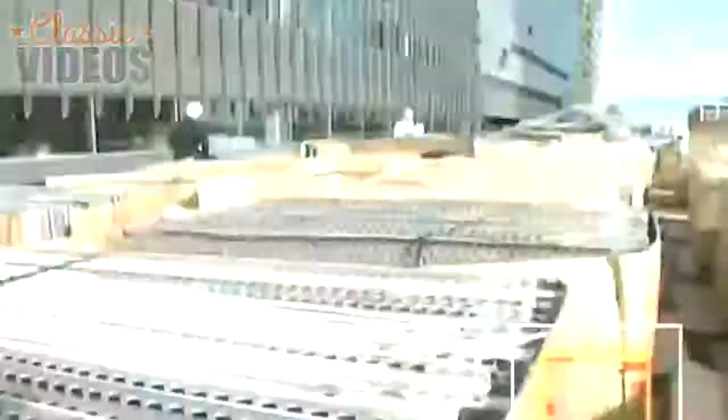For the past year, 8 months, and 20 days, the builders of the new California Department of Transportation headquarters in downtown Los Angeles have been busy pouring concrete, erecting steel, and installing walls and windows. The massive 750,000 square foot office building looks almost completed from the outside, but the structure is still pretty naked on the inside.

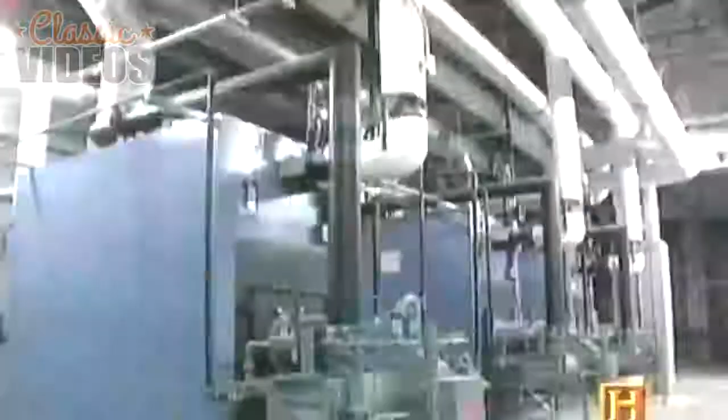It'll take another 7 months to finish installing the heating, ventilation, and air conditioning system and elevators. These are the things that make working in a large office building possible, even bearable.

Beyond the introduction of steel cage construction, no invention helped buildings, including our own, climb higher than the elevator. If we did not have passenger elevators, we don't have the modern multi-story office building, because people won't walk more than 2 or 3 floors off the street to easily reach an office.

The Caltrans building will have 19 elevators to shuttle its 2,000 employees to upper floors. Kone Incorporated will soon begin installing them.

In the meantime, Clark Construction is running a temporary man lift to move workers and materials. At the helm, Bobby Jeffers, man lift operator extraordinaire. This is a man lift operator's life - you're always getting loaded and you're always having your ups and downs. I've been running the man lift for 25 years all over Southern California. I've built hundreds of buildings. I'm the main person that brings everybody up. The job won't run without me.

The site uses an operator for a more efficient flow of materials.

If I take you down, can I get a nice smile out of you guys? Going down, okay, you ready? Okay, hang on, hang on, baby.

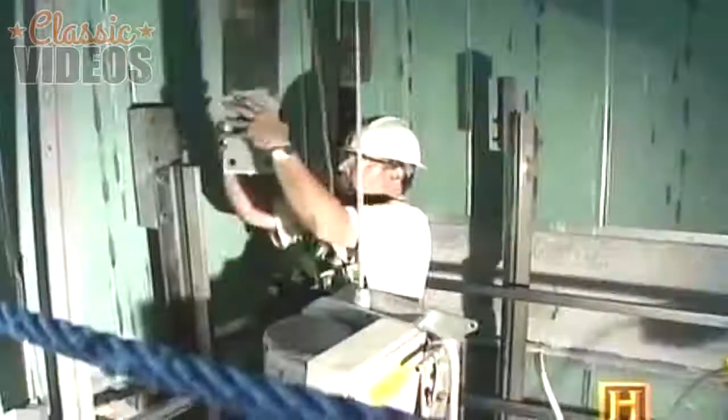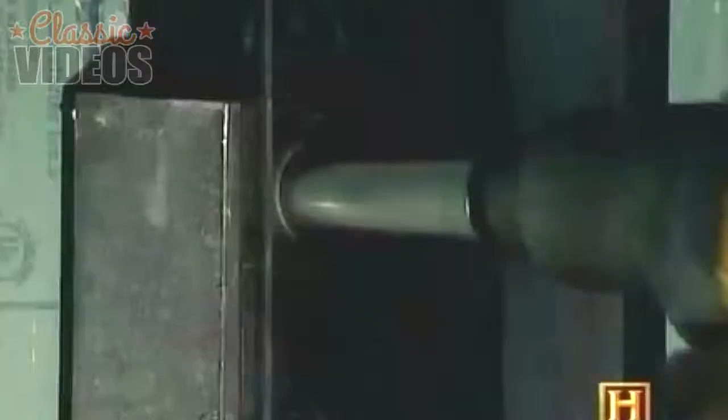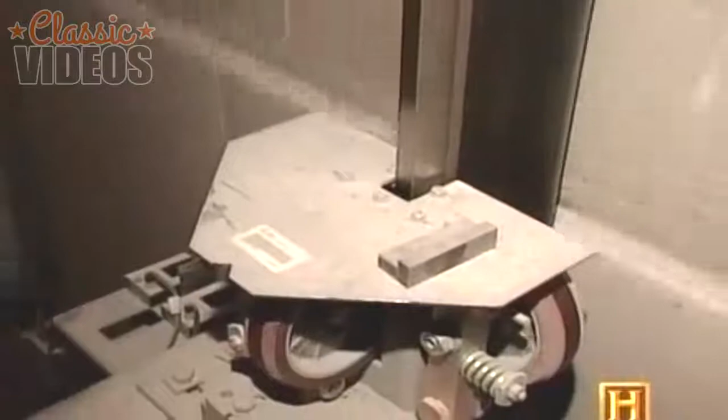The first step in the installation process is to attach the guide rails to the sides of the shaft. Our main part of the elevator is our guide rails - this is what the elevator travels on. It's very important that the guide rails are plumb. Anything crooked in the rail, the faster the car travels, the more you'll feel it. These cars travel 500 feet a minute - it's not a real fast car, it's not real slow, kind of in the middle.

Electric traction elevators are the most prevalent. They're called traction elevators because it's traction between the motor sheave and the cables that lifts and lowers the car.

Okay, we are in elevator 17 machine room. This is on top of the hoistway. This is our hoist motor, which we have the drive sheave under here with the hoist ropes on it. As it spins, it picks the car up and down, counterweight up and down.

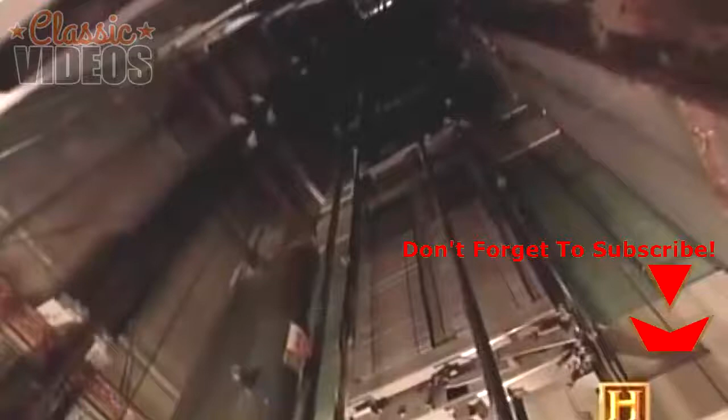The counterweight on this elevator weighs about 12,000 pounds. That's the weight of the car plus 50% of the car filled to capacity. This helps ease the amount of work required by the hoist motor.

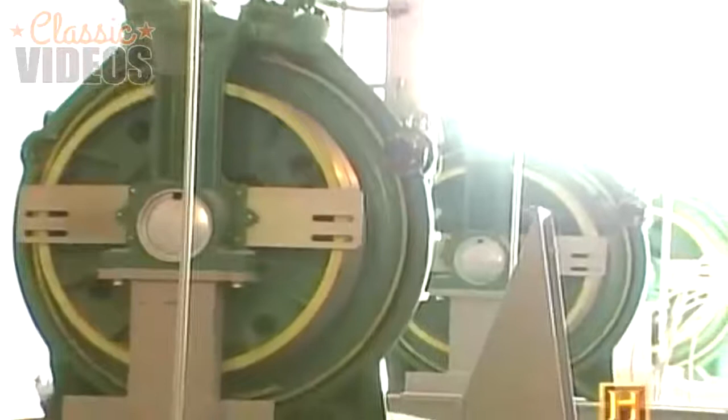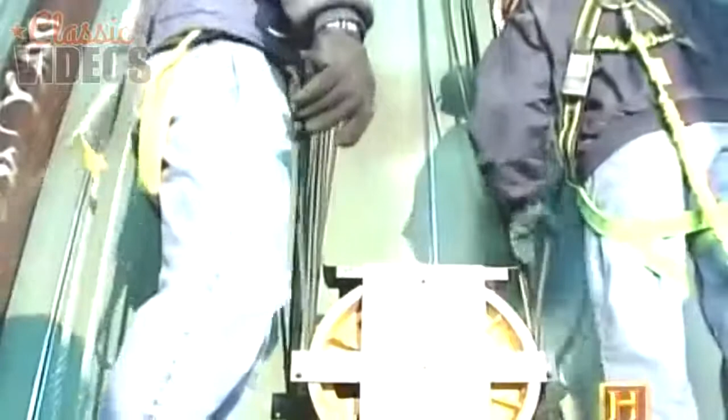Okay, right now we're roping up our cars using this elevator steel cable. We're starting out with the spools up at the very top, letting one dead end go all the way down, feeding it through our counterweight sheave. Then we're attaching it with a rope, and they'll pull it all the way back up to the very top where they put a shackle on it and hitch it up to the hitch plate.

The Caltrans job is going pretty smoothly. Then, one of the elevators hits a bump.

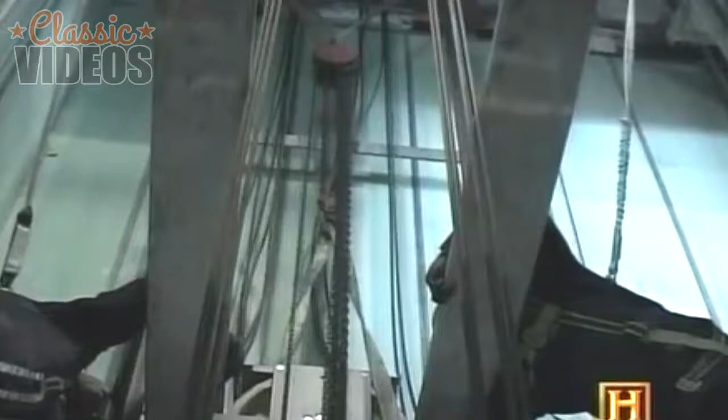After successfully roping 8 elevators, the ropes from one have unexpectedly jumped off their sheave. Dangling over an open shaft, the engineers try to sort out the tangled ropes and get them back on the sheave.

Okay, this is 1. Yes. This is 2. Okay, establish the next one. Wait, this one I'm shaking. Look where I'm shaking. This one is 1. Okay, let me spell it out to you. Grab the number 1 right here, put number 2 right here, so I can get 1 and 2 in order here, because I can't see it.

The engineers worked 2 days to sort out the problem. It was quite a project to fix it. We did have it all back up and running again. We noticed that the ropes were damaged, so actually we have started replacing them. We have to put all new ropes in the car.

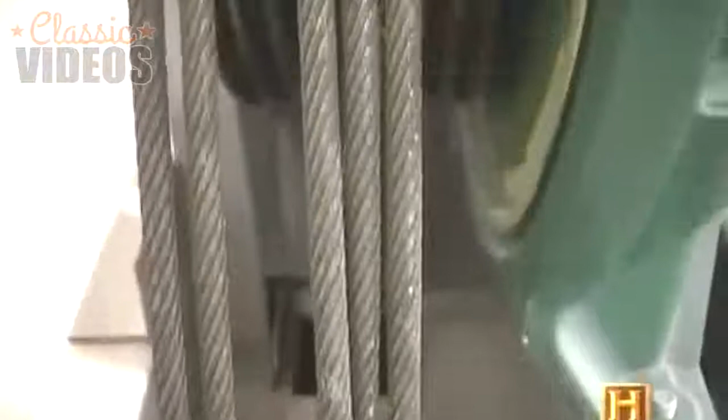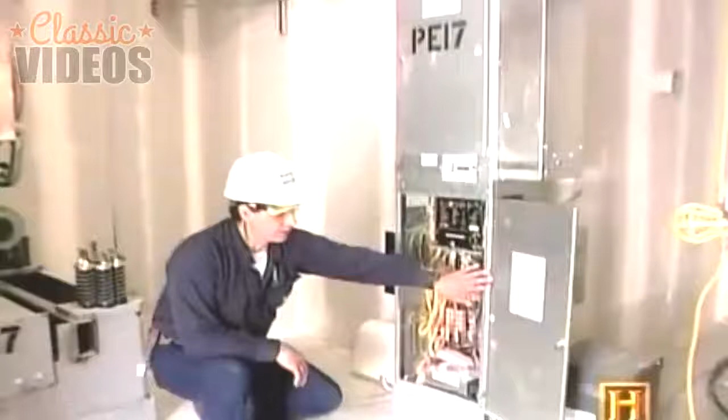Besides the hoist motor, the elevator computer, or controller, is also located in the machine room, above the shaft. This here is our controller. This is the brains of the elevator. It tells it what to do. It monitors what it is doing. The computer tells the car what floor to go to, when to open the door, and on some elevators, how much weight just stepped onto the elevator.

And believe it or not, the door close button is actually connected to the computer.

The controller also regulates the speed of the car. One of the biggest fears people have about riding in an elevator is a sudden uncontrolled free fall. It's simply the misconception or misperception we have of elevators from television programs and movies where the cables are constantly breaking and the car plummets sort of helplessly down the shaft. That is almost impossible given modern safety devices.

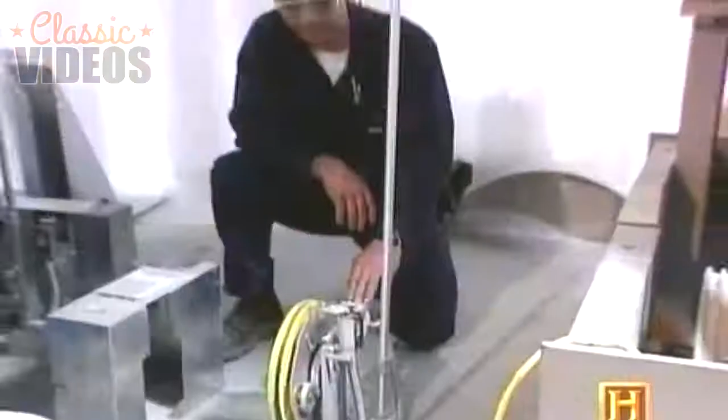One of those devices is the governor, which monitors the speed of the car. If the car were to fall and go faster than it's supposed to, it will recognize that and stop the sheave from spinning, and it will stop this cable from spinning.

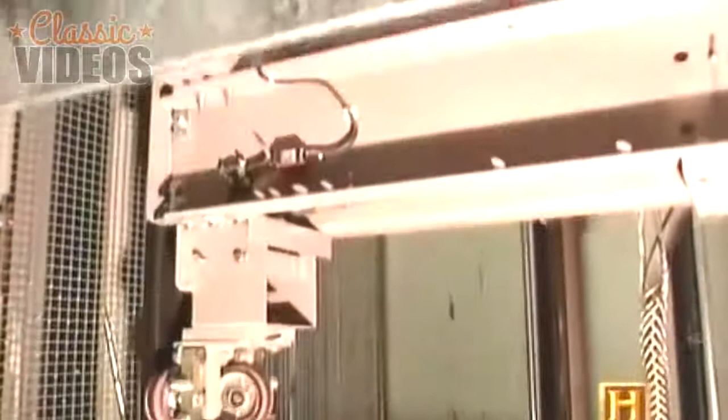There are also safety brakes under the elevator car, which clamp down on the rails to stop the car in the event of a fall.

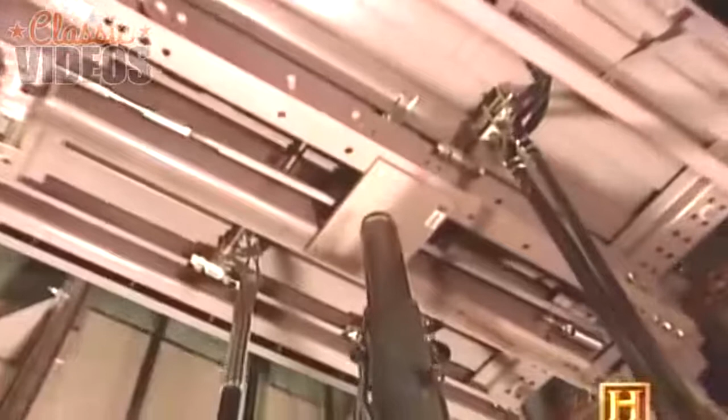If all else fails, there's even a cushion in the bottom of the pit. So we have a hydraulic buffer here. If the elevator were to fall down the hoistway for a short distance, this hydraulic oil buffer will catch the car. This thing compresses. The faster the car comes, the faster it will stop the car.

With all the safety mechanisms, there's really no need to worry about an elevator plummeting down a shaft. But that hasn't always been the case. Elevators used to be slow and sometimes dangerous, yet luxurious. Still, this economically uplifting invention would change the rules of real estate.

After 25 years of ups and downs as a man lift operator, Bobby's retiring in 7 weeks. I think Bobby's great for morale because you come in all tired and grumpy, and he'll make sure that you smile, say hello to everyone. Did you say good morning to everybody, Juanito? Good morning, everybody. Come in a bad mood, Bobby's right here, picks you up. Look happy now, smile. Let's go get him.

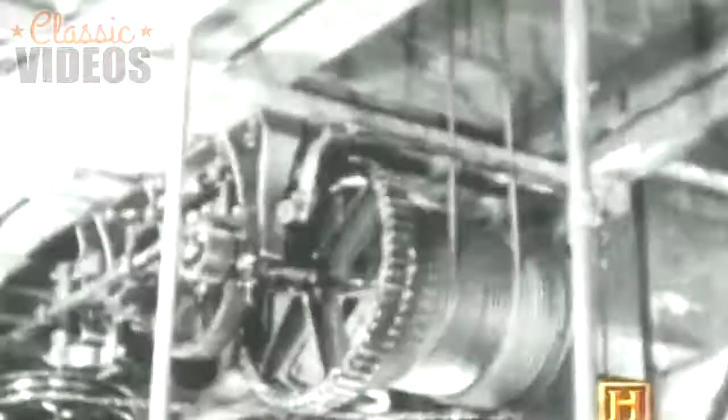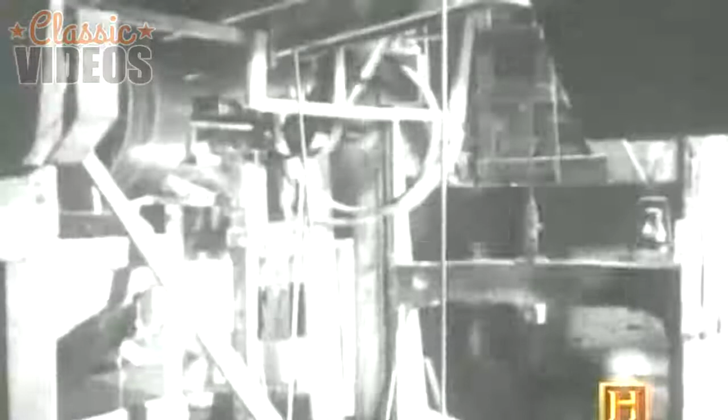The benefits of elevators were clear, but several deaths caused by freight hoist accidents proved elevators weren't yet safe for transporting passengers.

Enter American inventor Elisha Graves Otis. In 1852, Otis installed the first hoist with a safety brake in a factory. The following year, Otis demonstrated his new invention to the public at the Crystal Palace Exposition in New York. He would have the platform lifted up, and Otis would be standing on it, and then someone would cut the hoisting cable, and the car would fall, and then his improved brake would catch and stop the elevator car, and he would be safe.

Spectators were astonished.

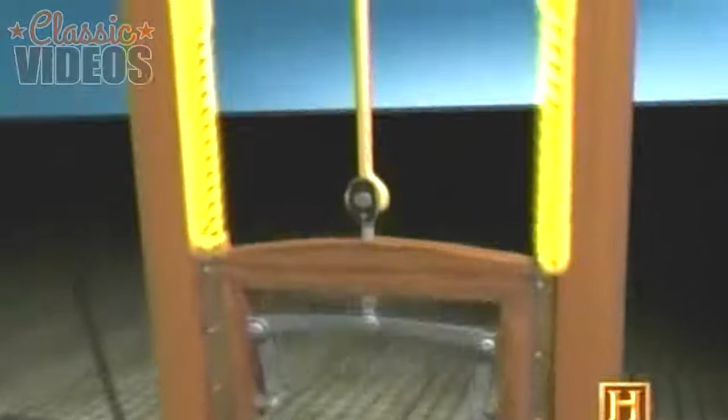The Otis safety brake consisted of 2 wrought iron catches on the car and cast iron teeth on the guide rails. If for some reason the hoist rope broke or slipped, a spring tripped the catches, forcing them into the teeth on the sides of the shaft, stopping the fall.

This simple but ingenious device made elevators safer for moving passengers. Soon, the first passenger elevators started appearing in department stores and luxury hotels. The elevator was introduced as another luxury item, literally a movable room with upholstered seats, mirrors, chandeliers, and an operator. That gracious moving room carried patrons of the hotel from floor to floor.

But the elevator quickly changed from luxury convenience to economic necessity. The new invention now made taller buildings feasible, altering the economics of real estate forever. Developers soon realized the new elevating device could also elevate office rents.

In 19th century New York, the primary mode of transportation was horses. Because of not only the horses but other activities, there was a lot of dirt, noise, and smells, and being above that had an obvious advantage. With an efficient means of getting people to the upper stories, the top floors, which previously had been less desirable, were suddenly the most valuable space.

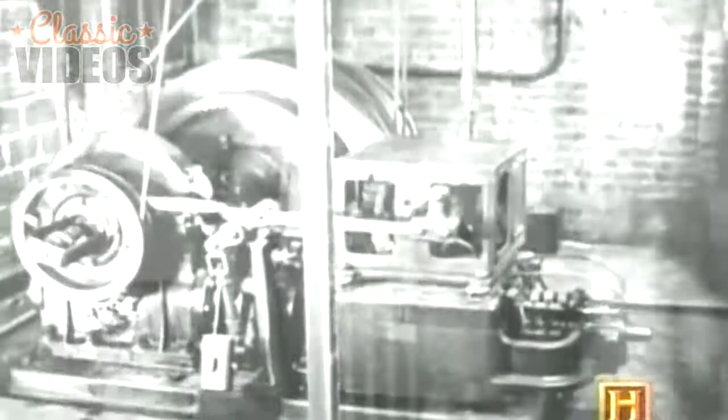The first push-button automatic elevators started appearing in the 1920s, making elevator operators obsolete. There was a surprising amount of skepticism about operatorless elevators. People did not want to run them themselves. They viewed this as too complicated, which sounds very strange to us because they looked the same. Many elevators had buttons very similar to today.

Today's elevators are a far cry from the slow, moving rooms of the past. Elevatoring is probably the most important thing for a very tall building. If you don't get the people up there, you don't have a building.

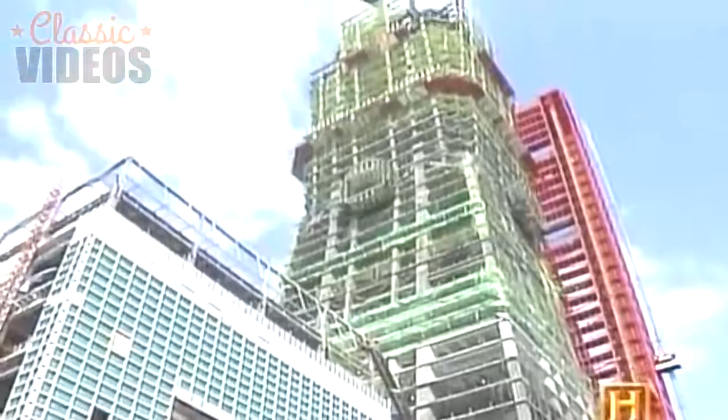Builders of the new Taipei 101 in Taiwan faced greater challenges than normal when designing the ultra-sophisticated elevator systems for the world's tallest building. In a structure this large, just getting people in, out, up, and down presents unique challenges.

There will be 12,000 people working in the building after it's completed.

We know it's important to transport these people to the floor they intend to go to in a short time. Therefore, we divided the vertical transportation system into 3 zones in order to make transportation go more smoothly.

Also, the elevators are double-deck elevators. This doubled the efficiency of vertical transportation.

The Taipei 101 utilizes 61 elevators. The larger double-decker elevators can carry 62 people at a time.

We also have 2 of the world's fastest elevators. The speed of the elevator is 1,010 meters per minute, or 60 kilometers per hour. It only takes 39 seconds to bring people up to the 89th floor.

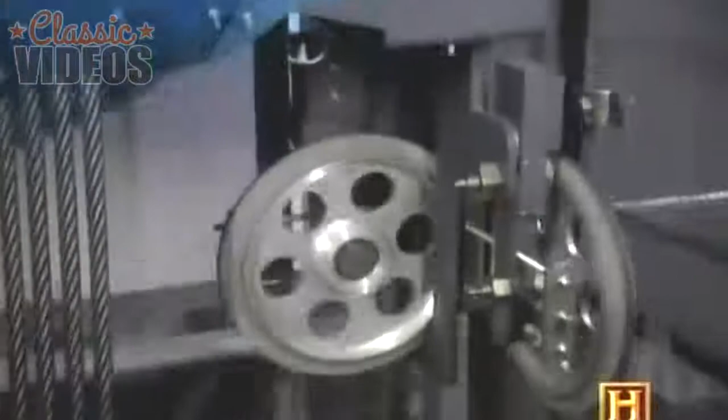At 37 miles per hour, the express elevators are the world's fastest. They're also the world's most advanced. The cars are streamlined to cut down on aerodynamic drag and wind noise.

Toshiba Elevators of Japan spent more than a year testing various systems. First of all, we must have a very powerful motor. Secondly, we need a little damper in the cab so that it will not move around too much.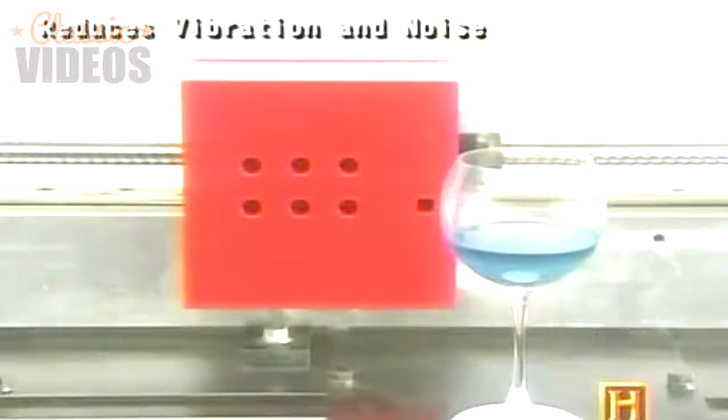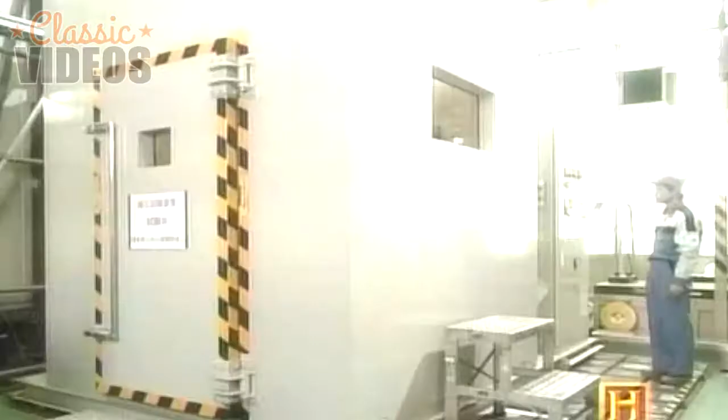Under each cab is a vibration balancing system, which uses sensors to quickly move weight back and forth to counteract vibrational forces. And thirdly, we need to pressurize or depressurize the cabin in order to give people a more comfortable feeling on their ears. Pressure chamber testing helped determine what was comfortable.

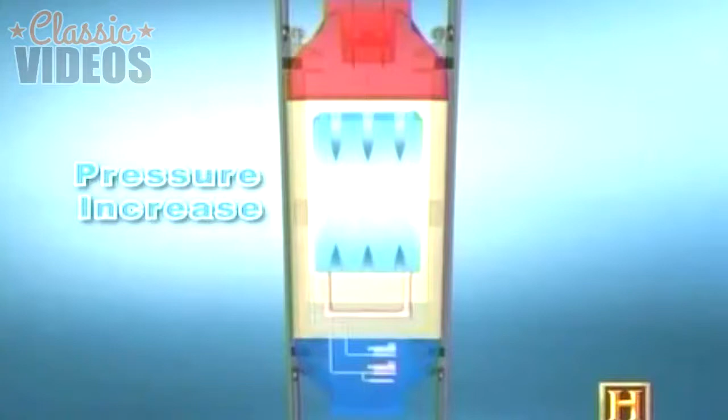The 2 express elevators move so fast, they're pressurized on ascent and depressurized on descent. To avoid a sudden change in atmospheric pressure, each cab has a high-pressure blower and exhaust release control system.

Engineers on the Taipei 101 have pushed elevator technology into the stratosphere.

Back in Los Angeles, the elevator mechanics are making good progress on the Caltrans building's 19 elevators. After 4 months, the first 2 are already up and running.

They make Bobby's rig obsolete. It's last week, Friday, right? Yeah. Are you gonna miss me? Oh yeah, everybody's gonna miss you out here, Bobby. This guy's worked with me since back 20 years ago. He come in the elevator and said, hey, what?

After 42 years in construction and 25 years as a man-lift operator, Bobby's retiring. Friday will be my last day, January the 16th. 42 years, it's all been good. I've helped put a lot of buildings up. I've brought a lot of cheer and made a lot of guys feel good about themselves. And it's been great, I'm gonna miss everybody. They've all been like my second family.

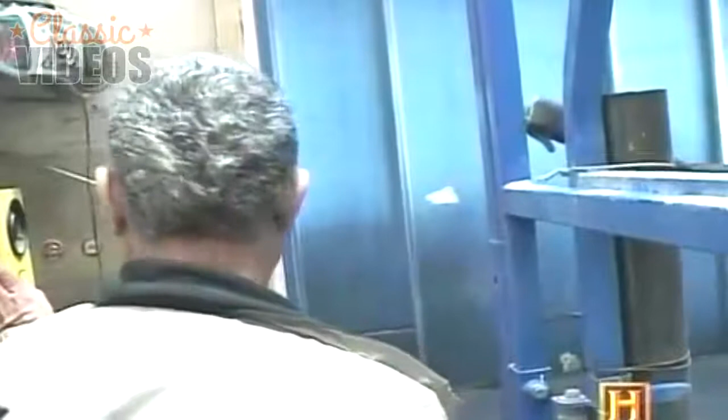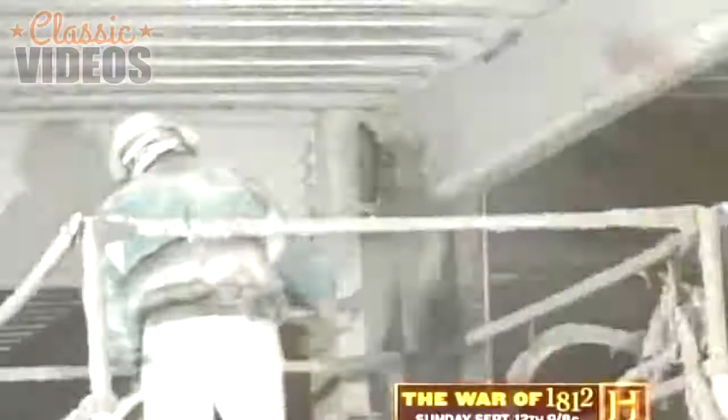When designing a building, engineers and architects spend a lot of time creating a human environment that is both comfortable and convenient. And that includes creating a safe environment. One way engineers protect the structure of a building is to apply fireproofing to the steel skeleton.

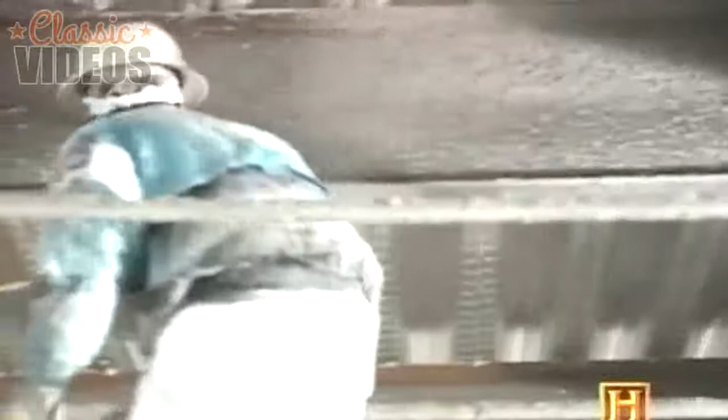On the Caltrans building, fireproofers spray a coat of Monokote MK-6 on the exposed columns. It's a gypsum-based, cement-like material that goes on wet and dries to form a hard shell. In the event of a fire, the fireproofing material will help insulate the steel from heat.

A fire in a building can easily reach 2,000 degrees. Structural steel starts to lose its strength around 1,000 degrees, and therefore steel isn't actually any more fireproof than, let's say, a wood structure is. Fires have been the bane of civilization for centuries.

Fires spread easily between buildings, which were densely constructed and most often made of combustible material such as wood. American cities were no exception. People were very concerned about fire in the 19th century because they had the experience, on more than one occasion, of major cities burning down. We don't have that today, but they had the Chicago fire. New York burned twice, in the 1830s and again in the 1840s. Boston had a major fire. Baltimore had a major fire. As early as the late 18th century, architects had begun the quest for what they hoped would be a fireproof building.

That's the first time we see builders trying to construct buildings without using any combustible materials. And that's what fireproof meant. It meant buildings constructed without using any combustible materials.

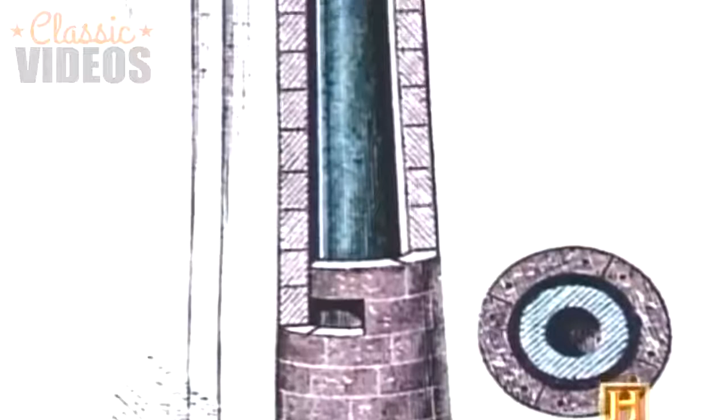Unfortunately, the Great Chicago Fire of 1871 showed that merely using non-combustible materials, such as masonry or cast iron and steel, still left buildings vulnerable. When it was discovered that the structural metal buckled or was damaged by high heat, the idea that it too had to be insulated from the heat led to the introduction of materials to protect structural metal. Builders started encasing columns in terracotta, fired clay, to protect the structural members from heat during a fire. Later, engineers slathered plaster or concrete over wire to protect structural iron and steel members. When properly designed and implemented, these early fireproofing methods worked well.

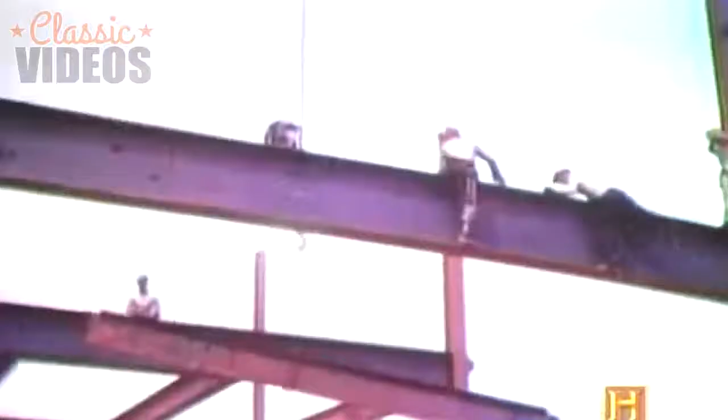It wasn't until the 1950s that the first spray-applied fireproofing was introduced. But one of the ingredients of the early spray-on fireproofing posed a hidden danger: asbestos.

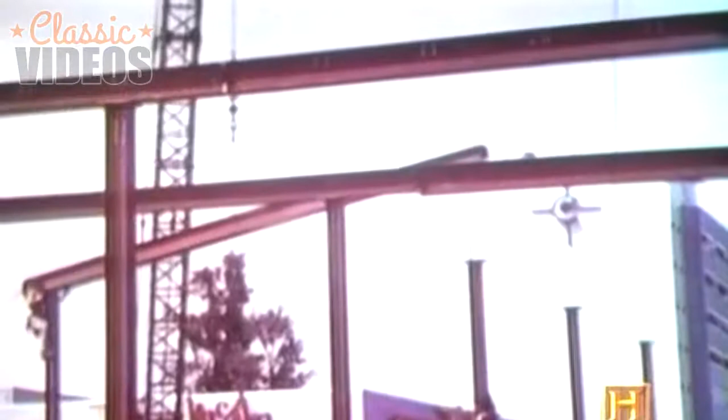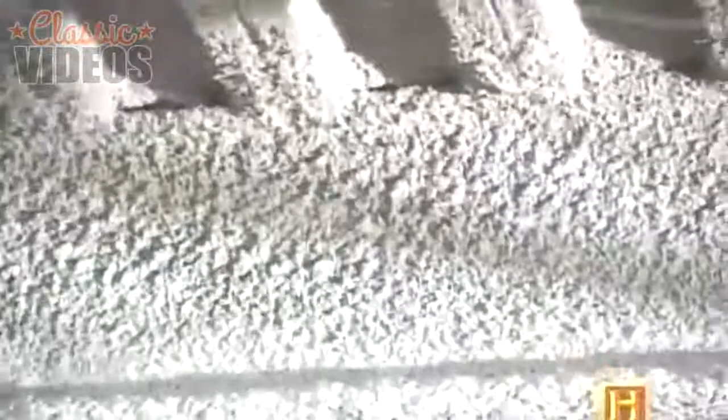Asbestos is a mineral which was used extensively in many products because of its fire-resistant qualities. It turned out that the asbestos versions of spray-on adhered to the steel very well, and asbestos is a known fireproof material, which is why so much of the early fireproofing is laden with asbestos—because in the 1950s it was the best material they had, and they didn't yet know about the medical problems with it. Studies showed long-term exposure to asbestos increased the risks of lung cancer. In 1973, the spraying of asbestos-containing material was banned. And therefore, the fireproofing we're spraying on the Caltrans building doesn't contain any asbestos.

Fireproofing is meant to protect the structure during a fire, and as a result, save lives. But occupant safety hasn't always been the primary concern. Over the past 140 years, the emphasis on the protection of property during a fire has shifted to an interest in the preservation of life.

In the 1860s, when some kind of supplementary egress was first required in New York, most inventors came up with block-and-tackle devices that people were supposed to use to lower themselves out of their windows, or chutes. There are dozens and dozens of patents for totally weird and ridiculous things. External fire escapes first appeared on tall tenement buildings and factories with heavy concentrations of people inside.

But one horrific fire proved how inadequate the flimsy, poorly maintained, and rarely used outside fire escapes were. The most deadly factory fire in New York history occurred at the 10-story Asch Building in Greenwich Village on March 25, 1911.

Hundreds of people, mostly immigrant women, were at work at the Triangle Shirtwaist Company, making clothing, when a fire broke out. There were so many combustible things in that building. It was probably like an explosion. It spread very quickly. People could not get out from the stairways.

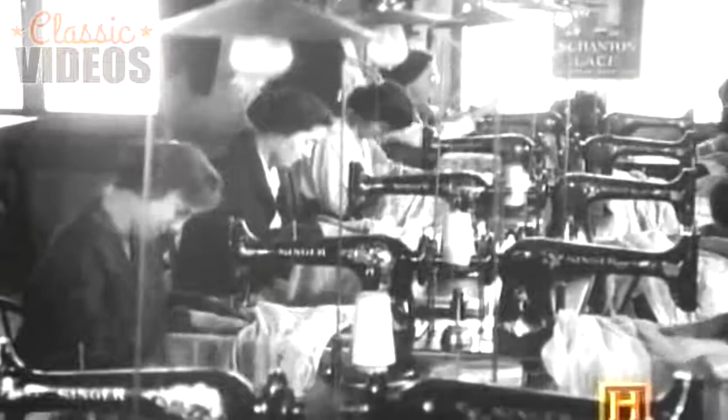The horrific fire sparked changes in health and safety legislation, including factory fire codes and labor laws. Today, a building's life safety systems are as important as any facet of design.

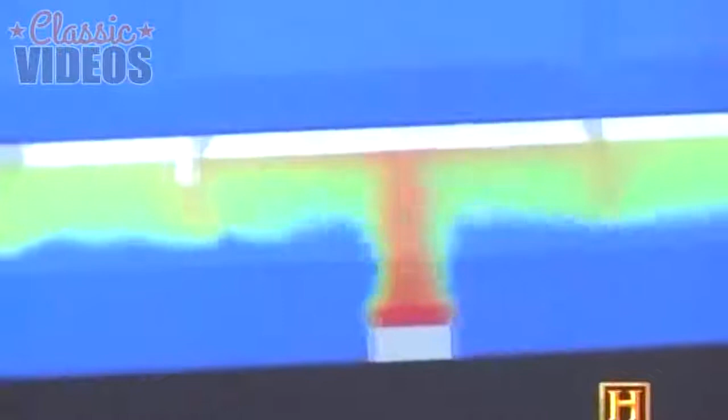Computers can help engineers design ever more efficient life safety systems. It's called Fire Dynamics Simulator. Actually, it was developed by the U.S. government for modeling these fire scenarios.

It lets you build a building and then put a fire in, put systems in like sprinklers or smoke control, and then basically model what will happen during an emergency event and see where the smoke will go, what the temperatures will be like.

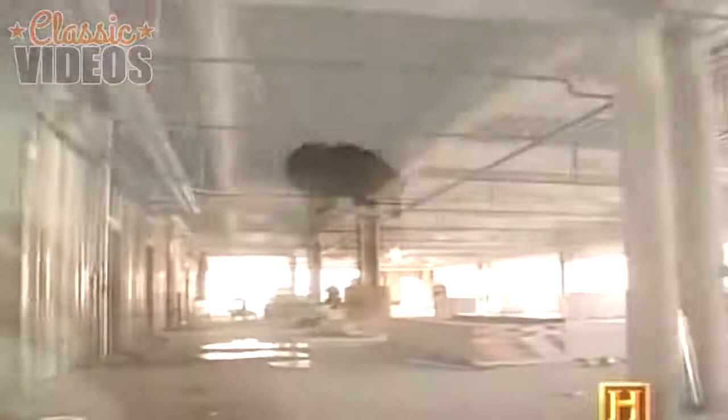The life safety systems on the Caltrans building include 7,500 sprinkler heads, fed by 21 miles of pipe. It's not like the movies where you see one goes off and sort of everything in the building starts getting flooded. Most sprinkler systems activate based on heat, so that the sprinkler that actually heats up will then fuse and activate, while all the sprinklers that are further away, if they're not heated, won't be pouring water down.

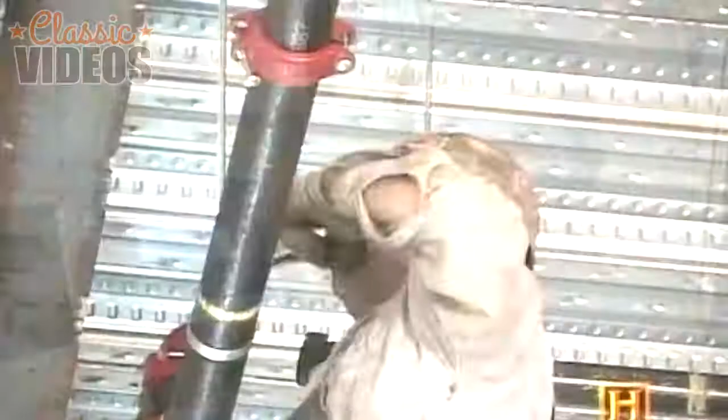But the sprinkler system isn't the only emergency system. There are also 2 active smoke control systems. Behind us there's some stairwell pressurization, which is basically a safety in case there's a fire. It pressurizes the stairwell, keeps it locked tight so no smoke can get in while people are evacuating the building.

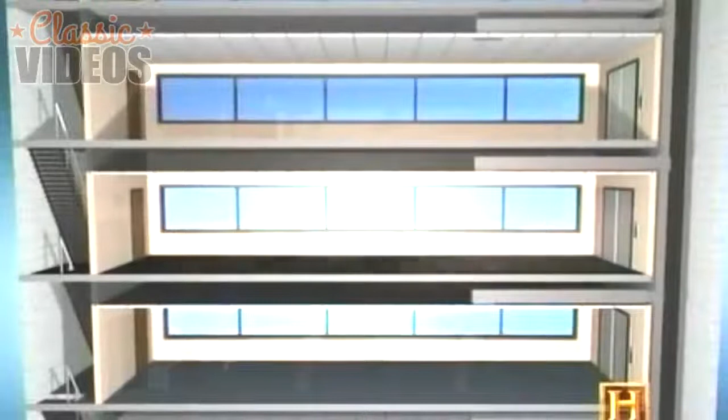Another system inhibits smoke movement between floors. When smoke is detected on one floor, that floor becomes negatively pressurized relative to adjacent floors, in essence creating a pressure sandwich that isolates the smoke and heat on the fire floor.

Life safety engineers hope their systems never have to be used. But by applying the lessons of the past and implementing today's technology, they're helping ensure there is a tomorrow for those stuck in a building during an emergency.

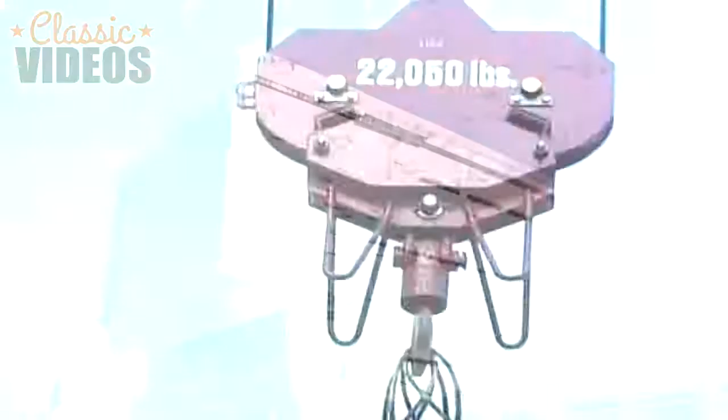One of the most sophisticated systems in any large building is the heating, ventilation, and air conditioning, or HVAC system. Keeping the 750,000 square foot Caltrans office building cool in sunny Southern California is going to be quite a chore, requiring thousands of tons of equipment and 20 miles of ductwork.

Comfort is incredibly important because when people are not comfortable, when they are in an uncomfortable environment, people are less productive. Arup is the mechanical engineering company on the Caltrans project.

They're responsible for designing the systems that keep people comfortable. Comfort's a combination of things: temperature, relative humidity, and air quality itself. These are the key components of comfort through the eyes of the mechanical building engineer.

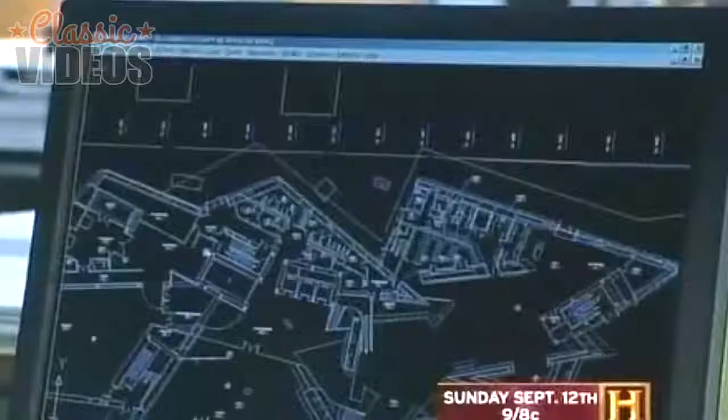Like every other party involved with the design of the building, mechanical engineers rely on computer software. It's a computer-aided drafting tool, two-dimensional. What we start with here is a typical building layout. Here is the ductwork, the air conditioning ductwork layer, and on top of that we can start to add the lights, sprinkler heads, those sorts of things.

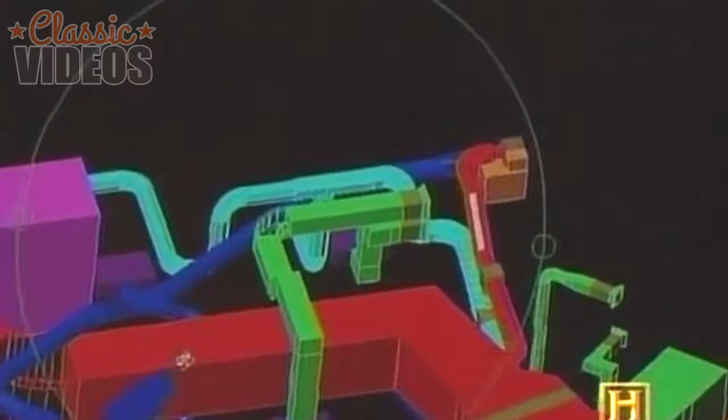For complex systems, the mechanical engineer sometimes builds a 3D model to better visualize the way all the components work together. These tools are helping mechanical engineers design even more efficient systems.

We have taken the idea of indoor environmental control from a concept that once was considered the realm of the gods, something that was considered impossible to do, to the point now where it has become so reliable and so quiet, so inexpensive, and so hidden that most people think heating and ventilating and air conditioning is nothing more than a thermostat on a wall.

Before the 20th century, climate control was just a dream. For thousands of years, the only product people had to keep them cool was ice. But ice was primarily a seasonal luxury.

By the 19th century, American entrepreneurs started harvesting ice in the winter and storing it in insulated ice houses for consumption in the summer. An iceman delivered the cold commodity door to door, but the ice was used in ice boxes for food preservation.

Not for room cooling. It took the hot lead from an assassin's gun to inspire one of the first attempts at an air conditioning system.

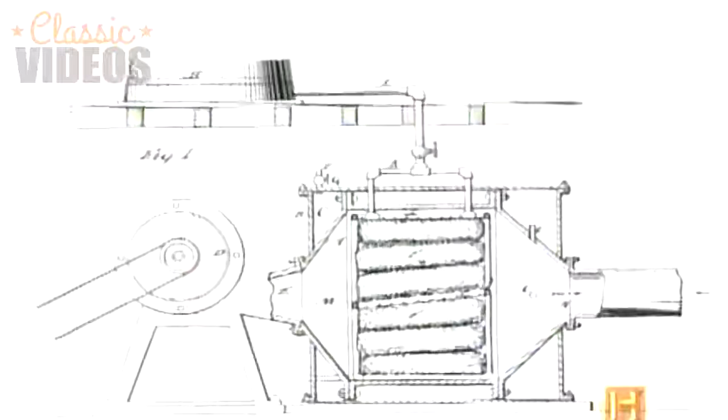Engineers from the Navy Department decided to adapt a recent invention for keeping food cold. Their device had a cistern filled with water and shaved ice. Ice water trickled down through a perforated metal pipe onto 36 terry cloth-wrapped rollers. A fan at one end blew air over the saturated rollers, then through ducts and into the president's room.

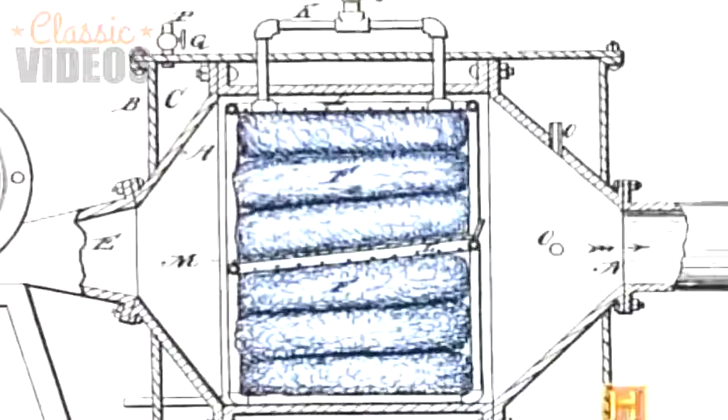At the same time, engineers tried to reduce the humidity by placing a large box filled with ice on the outflow side. They believed the water vapor would condense out of the air because cold air can't hold as much moisture as warm air. They called it air cooling, but in effect they were hitting on exactly what it is that makes for modern air conditioning, that is, controlling both humidity and temperature at the same time.

For 11 weeks, the device helped to comfort Garfield, but it wasn't enough to save him. He passed away September 19th, 1881. The problem is it required 4 tons of ice a day to operate, a prohibitive amount even for the White House. It wasn't until the turn of the 20th century that air conditioning as we know it was born.

Willis Carrier was asked, as an employee of the Buffalo Forge Company, to design a system which would control the humidity in the summertime at a printing plant so that the colors would properly register. What he did was come up with a system which used a combination of cold well water as well as a mechanical refrigeration system to cool the water and then dehumidify the air. That system started him on a journey which led to his ultimately being called by many people the father of air conditioning.

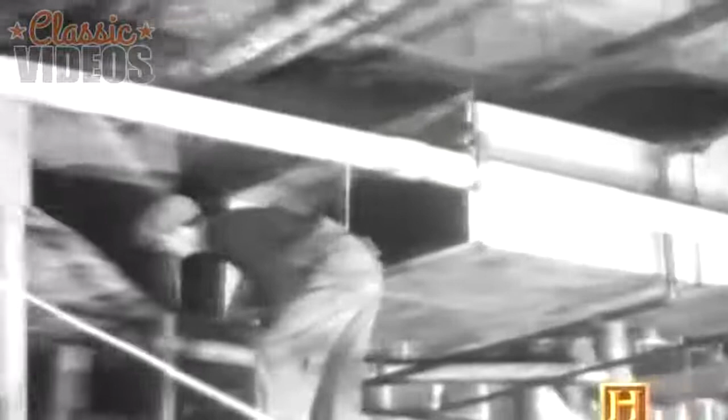Movie theaters were among the first large structures to adopt the new technology. However, the expense discouraged new office buildings from quickly following suit. One of the first high-rises to employ air conditioning was the 36-story Philadelphia Savings Fund Society, or PSFS building. Howe and Lescaze in Philadelphia designed the PSFS building in 1932, which is the first modern, fully air-conditioned structure.

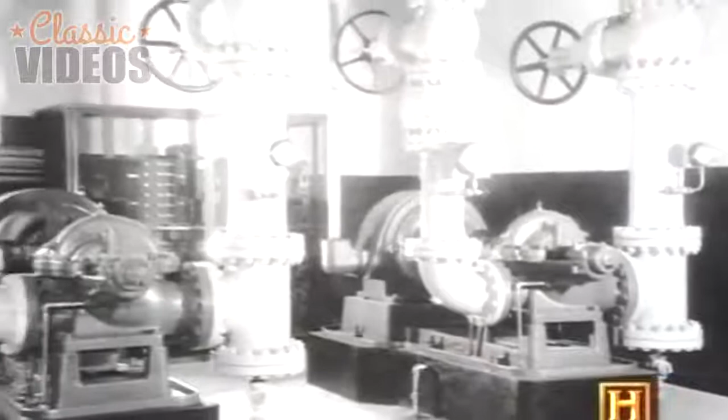Air conditioning continues to develop, but it's that moment when the tall building is free to be completely sealed up. Beyond not having operable windows, the PSFS building had dropped ceilings to conceal ductwork. It had mechanical rooms on several floors to reduce the space required for vertical ducts. Engineers even hid the building's unsightly cooling equipment behind the distinctive PSFS sign on the roof.

Even the Empire State Building, constructed just a couple of years before the PSFS building, didn't have air conditioning until 1950. The pioneering techniques first employed by the PSFS building are still being used today.

The buildings constructed after World War II presented even greater challenges for climate control engineers. The tremendous use of glass as a popular cladding made keeping interiors cool more difficult. Fortunately, the development of more efficient HVAC systems, tinted glass, and window coatings ensured occupants wouldn't bake inside the glass-encapsulated buildings.

At our building in Los Angeles, the first truckload of air conditioning equipment has arrived. The building's about to get a whole lot cooler.

At our Caltrans building, the Scott Company is the mechanical contractor responsible for installing the systems the mechanical engineer has designed.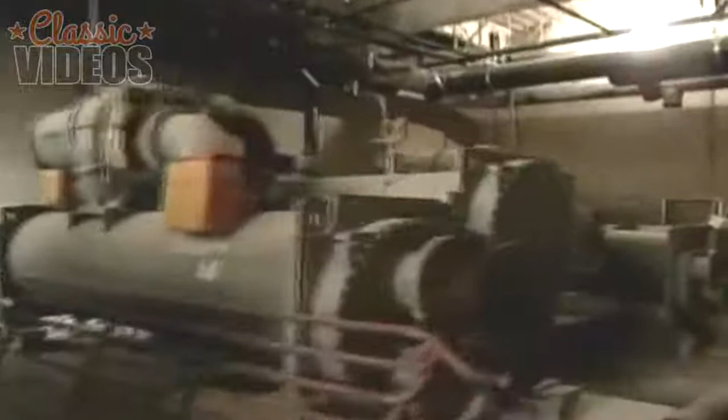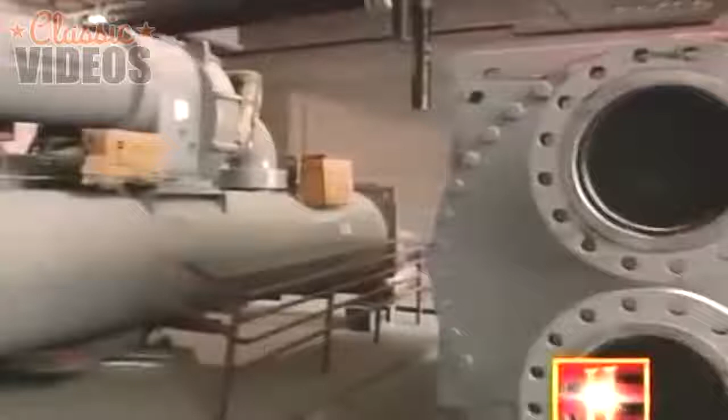To cool the building, Scott Company will install 3 massive Carrier chillers, the largest being 30,000 pounds. This is the mechanical room. This is where, in my opinion, the heart of this building lies. These are chillers, which, if you think about it, are giant air conditioners. All of the cooling abilities of this building basically come from these 3 units right here. The water is pumped into these chillers, is cooled, and forced out to different areas of this building to keep its occupants cool.

This process chills water to 44 degrees. The chilled water is then pumped to air handlers. This is the air handling unit.

Basically what happens is the cooled water from the chillers or the heated water from the boilers comes into these connections, and over here we have a coil. The water runs through this coil, whether it be hot water or cold water. The air, which comes from this fan over here, after being drawn through a series of filters, comes over this way, goes over this coil, and the air is either heated or cooled and goes through the building to provide either cold air or warm air for comfort.

The ductwork routes the air and takes it to where it needs to go. Steve Hinson is handling the installation of the ductwork.

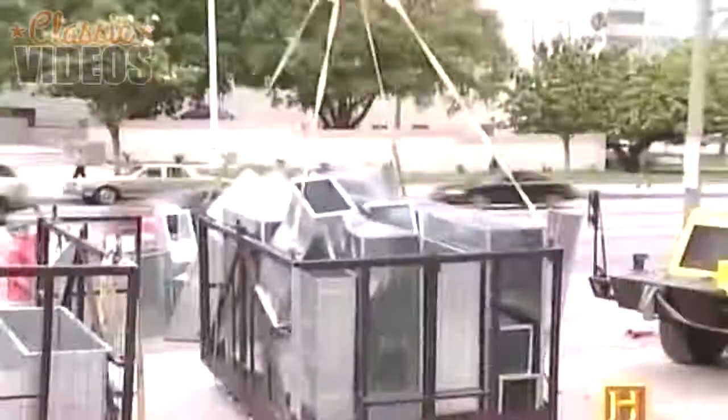All the duct has numbers. Each one of these pieces got a number on them, and that number correlates with the drawing, exactly where that piece goes. Scott Company will eventually run 20 miles of ducts.

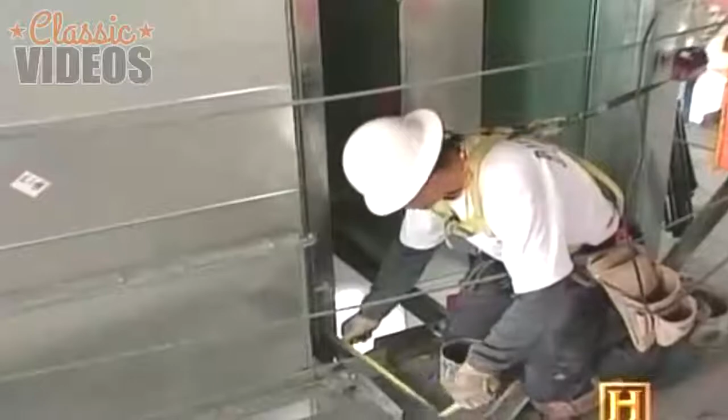This is actually the biggest job I've ever run. It's a real big job, and a lot of guys really don't think I should be running a job because of how young I am. I'm only 30. All eyes are on me right now. This job will either make me or it'll break me, and hopefully it makes me.

The 3 massive chillers that will cool the structure will also generate a tremendous amount of heat as a byproduct. So Scott Company is installing 4 cooling towers on the roof to take heat away from the chillers.

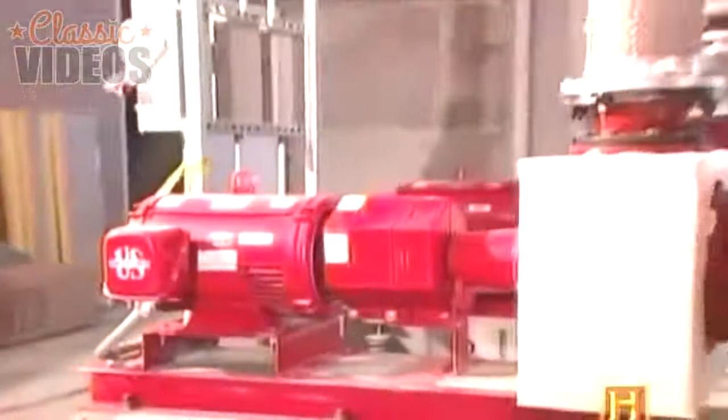Water circulates around a chiller to draw heat out of the machine. This condenser water, which is now hot, is pumped via 18-inch pipes to equipment on the roof. Okay, what I'm working on now is condenser water piping. Welding one of these 18-inch pipes takes about 90 minutes each.

They're visually inspected by a state inspector, and they can also be x-rayed if it's deemed necessary.

Basically what we have here is the fan section of the cooling tower, or the top section. The water comes in here on this PVC and it is distributed amongst these nozzles. The nozzles spray the water out in a light pattern. A fan pulls air up through the saturated baffles, cooling the water.

Cooled water is then sent back down to the chillers to be recycled through the system.

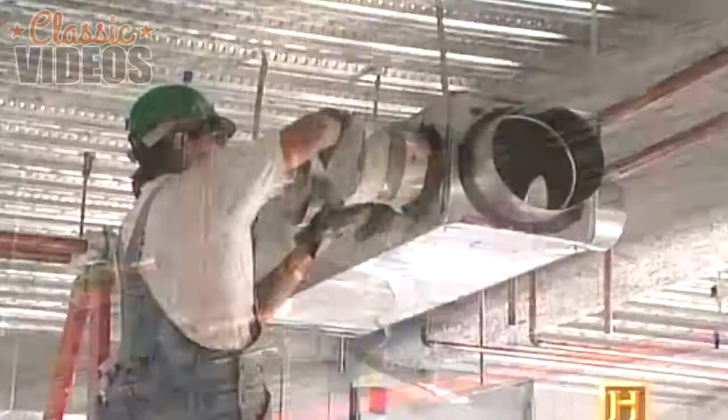To provide heating in the building, the Scott Company is installing 3 boilers. The boilers heat water, which is then pumped throughout the building to variable air volume boxes. Each VAV box services 4 or 5 offices. Inside the VAV boxes, coils transfer the heat from the water to the air, which is then forced into the offices via the same ductwork as the air-conditioned air.

But creating a comfortable environment is about more than heating and cooling. The V in HVAC stands for ventilation. Ventilation is a very important aspect of the design of mechanical systems. It is the process through which you intentionally bring in air from the outside in order to remove or displace the pollutants that exist within a building, pollutants like carbon dioxide, ozone, formaldehyde, and other substances like that.

The air handler units bring in fresh air and mix it with return air from the building. Ductwork then carries the conditioned air into the offices.

So we finally outfitted this empty shell with elevators, cooling equipment.

They don't belong here. Just throw that stuff out. Look at all that stuff. All right, just throw it out. And hot tempers.

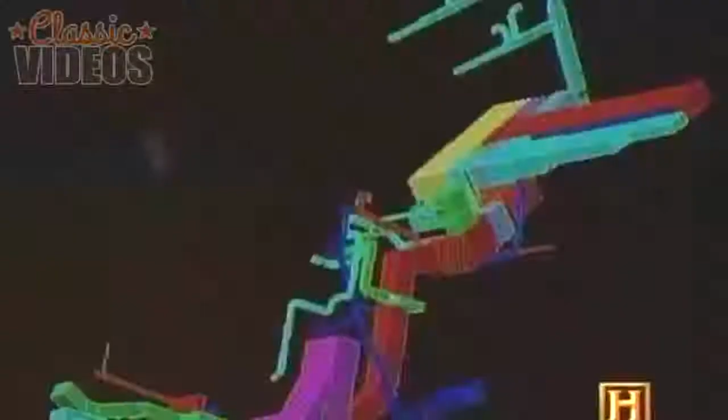The complex labyrinth of shafts, pipes, and ducts connecting every sector of the building like a giant web is representative of the diversity of experts it takes to create a safe, convenient, and comfortable human environment.

And one of those experts who helped get this building up is retiring today.

Good day there. Enjoy your ups and downs with all the guys. Take care of them, take care of the car. All right, Bobby, good luck.

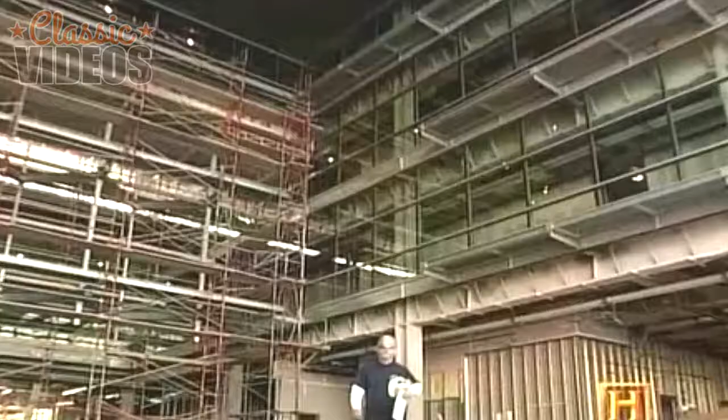See you later. It's a fundamental belief of ours that great buildings are made out of the unselfish collaboration of all the different parts. Watching the building go from the ground all the way to the top and meeting a bunch of good people on it, looking back, you know, to be able to tell my family, hey, you see that big tall building? Your dad worked on it. And it's exciting.

From now on, the Caltrans building will have to manage its own ups and downs.